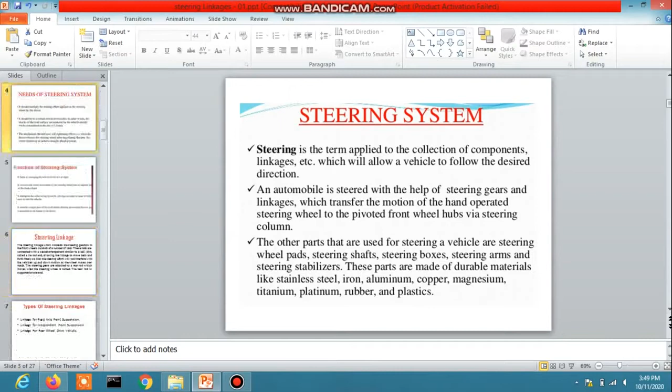Need of steering system. Some requirements of good steering are as follows: very accurate, easy to handle, provide directional stability, multiply the turning effort applied on the steering wheel by the driver, irreversible to a certain degree so that the shocks of the road surface encountered by the wheel are not transmitted to the driver's hand.

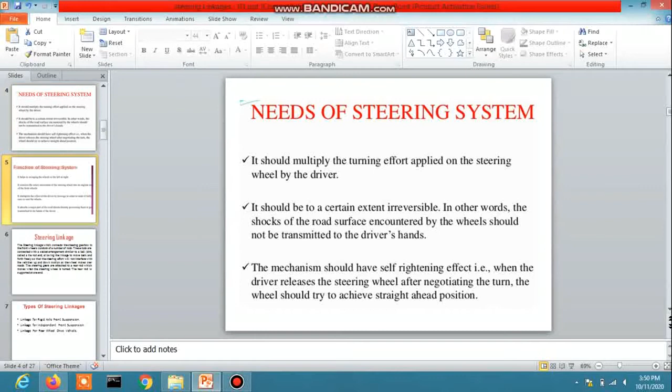Function of steering system. Some functions of steering systems are: the primary function of the steering system is to achieve angular motion of the front wheel to negotiate a turn. Second, to provide directional stability of the wheel when going straight ahead. To facilitate straight ahead recovery after completing a turn.

To minimize wear and tear of tires. To absorb a major part of road shock, thereby preventing it from being transmitted to the hand of the driver. And the last one is to provide perfect rolling motion of the road wheel at all times. So these are the functions of the steering system.

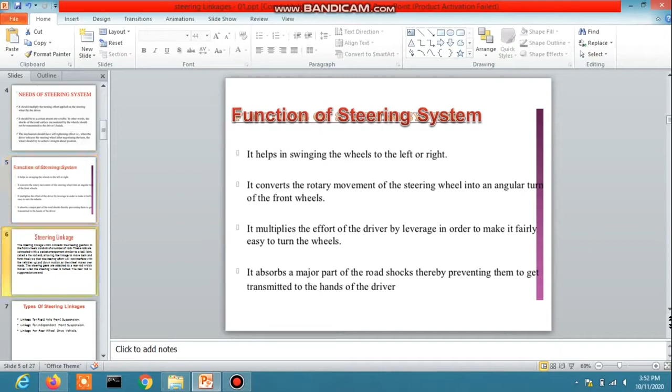Now steering linkage. Steering linkage, which connects the steering gearbox to the front wheel, consists of a number of rods. The rods are connected with a socket arrangement similar to a ball joint, called the tie rod end, allowing the linkage to move back and forth freely so that the steering effort will not interfere with the vehicle's up and down motion as the wheel moves over the road. Steering gears are attached to a rear rod which moves when the steering wheel is turned. The rear rod is supported at one end.

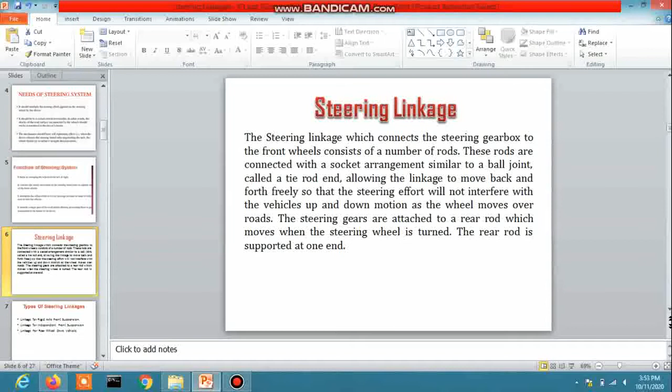Types of steering linkage. Basically there are three types of steering linkage. Depending upon the stability and simplicity, several arrangements of steering linkage are used on various vehicles. The first one is the linkage of rigid axle front suspension type. Second, linkage of vehicles employing independent front suspension. And the third one is the linkage for rear wheel drive vehicles.

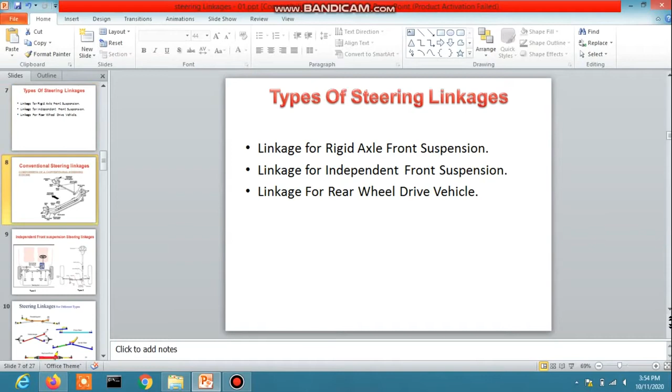Conventional steering linkage, that means this is the conventional type, that is the rigid axle front suspension steering system. So here is the picture of the conventional steering system. This one is the steering column or steering shaft or drive shaft. This is the steering gearbox. Pinions or gears are inside here.

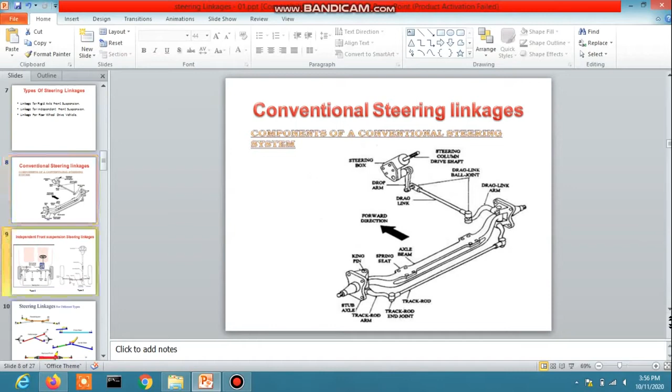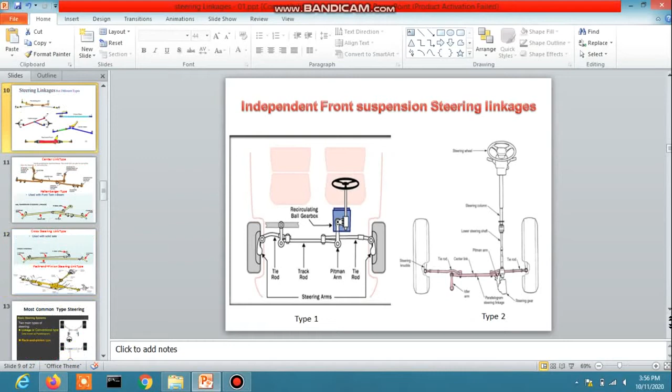Now there is the independent front suspension steering linkage. Independent front suspension steering linkage has two types. Here is the picture; there are two types of independent front suspension steering linkage. So the independent front steering linkages are of different types.

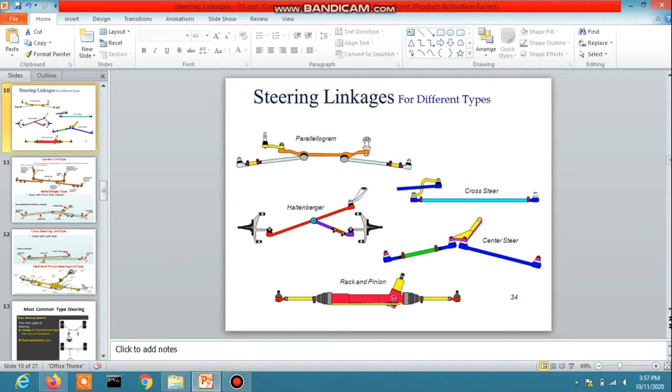One is parallelogram type or center link type. This one is the cross steer type. This one is the center steer type. This is the central link type steering linkage.

The typical parallelogram steering linkage: the central link also goes by the name of relay rod, drag link or connecting link. So the central link, one side is attached to the idler arm, which is attached to the body frame of the vehicle, and the other side is attached to the pitman arm, and the pitman arm is also attached to the steering gear.

Two tie rods are connected to the central link with ball joints, and tie rod adjusting sleeves are there. So inner tie rods are attached to the central link and outer tie rods are attached to the knuckle.

This one is the Haltenberger type, used with twin I-beam. Haltenberger steering linkage is basically the structure. One is the I-beam structure. So this is the pitman arm, which is attached to the drag link through a ball joint, and one end of the drag link is attached to the steering arm.

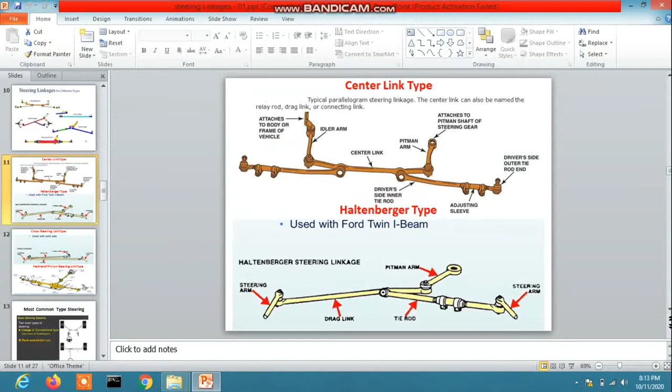Cross steering linkage type steering system, used with solid axle. Here we saw in the workshop, this Mahindra car is basically a cross steering linkage type steering system. So here the steering gearbox is not seen. This is the pitman arm; one side of the pitman arm is connected to the steering gearbox, and the other side is connected to the drag link with the ball joint.

The drag link goes to the steering arm or steering knuckle, and this one is the tie rod. The outer tie rod is connected to the steering arm, and the other side of the tie rod is connected to another steering arm. So this type is called cross steering link type steering system, and most solid axle type vehicles like Mahindra and other cars are using cross steering link type steering system.

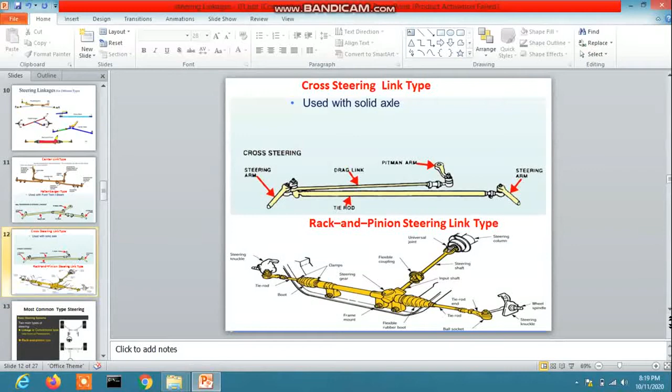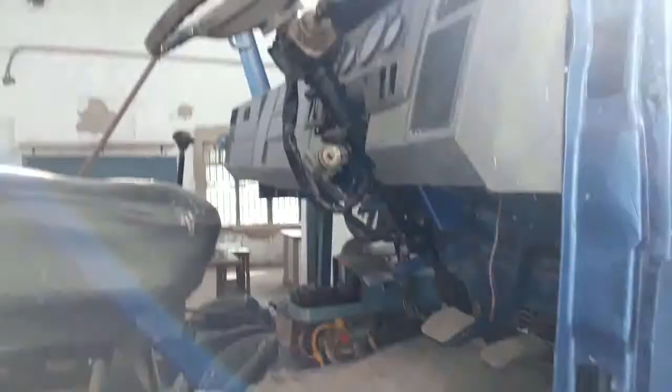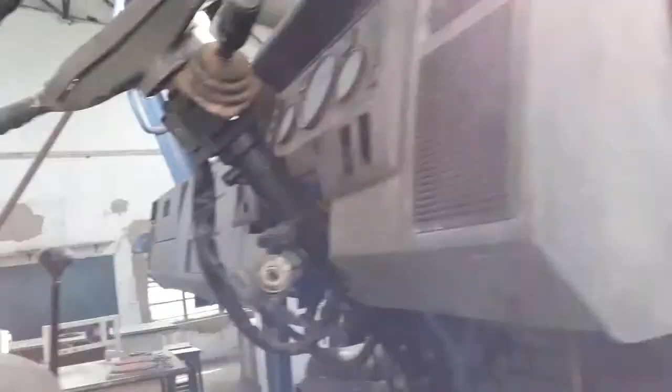So we also see this is the conventional type steering system, which is also used in Tata 408. It is the same process of linkage, but if you see the steering system minutely, this one is the steering wheel, this is the steering shaft, and this one is the steering column, which is the hollow type, and this is the combination switch.

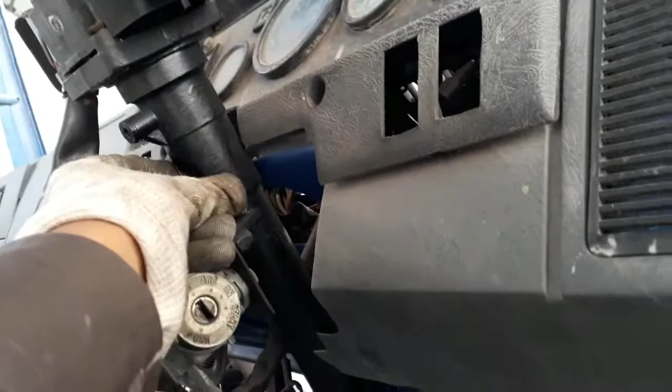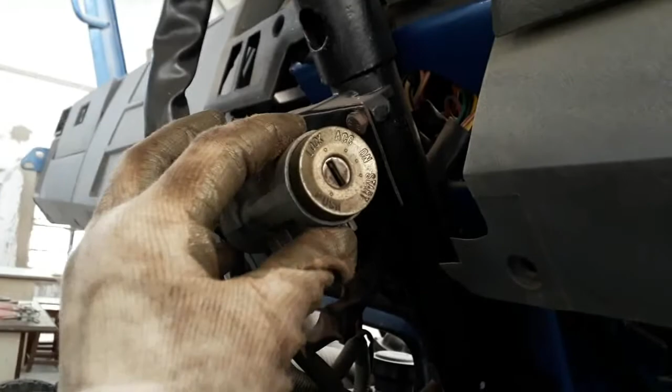This one is the turn signal light lever, this is the headlamp switch, and this other lever is the wiper lever or wiper switch, and this one is the locking device. And if you see, the steering shaft goes to the UJ, and this one is the intermediate shaft.

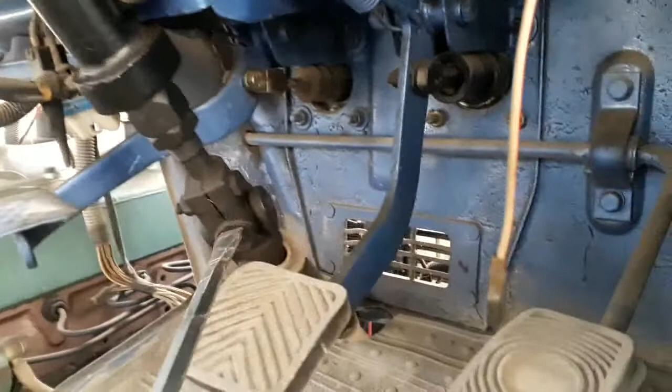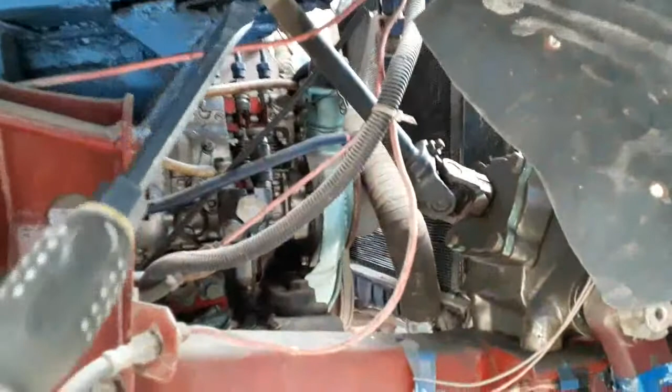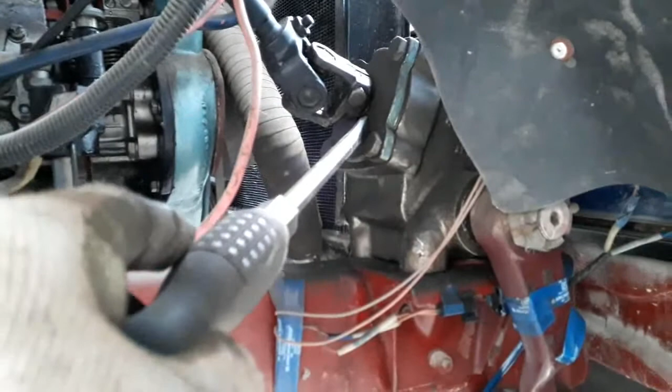If you see the lower part minutely, this is the intermediate shaft. This also goes to the UJ or universal joint, and the other part of the universal joint is connected to the steering pinion shaft, and this is the steering gearbox. This is another type of steering gearbox.

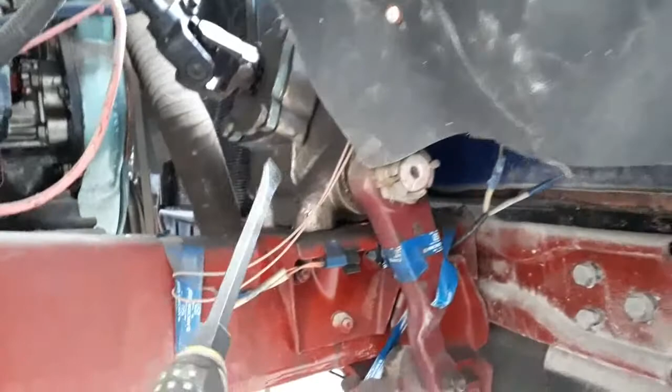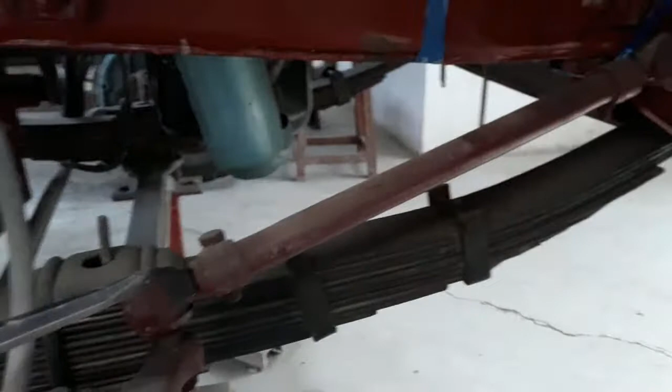Now if you see this one, after the steering gearbox, this is the cross shaft, and the cross shaft is connected to the drop arm, that is called the pitman arm, and the pitman arm is also connected to the ball joint, and this one is the drag link. The end point of the drag link is connected to the ball joint, and it is connected directly to the knuckle.

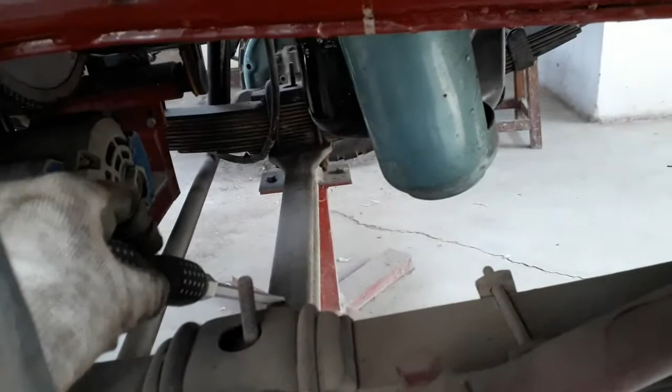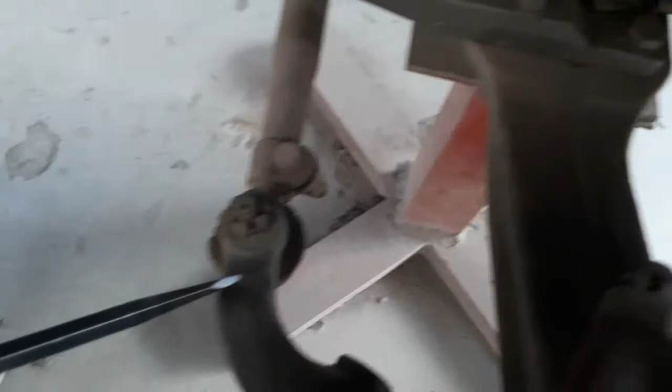Okay, and this one is the solid axle, that is the rigid axle, and if you see, the drag link is directly connected to the right side knuckle, and the other steering knuckles are connected to the tie rod, and this tie rod is a long shaft, and this is the ball joint. This is also connected to the knuckle and also connected to the tie rod. If you see, the tie rod goes to the other wheel, and it is connected to the knuckle. So this is the basic linkage of rigid type steering systems.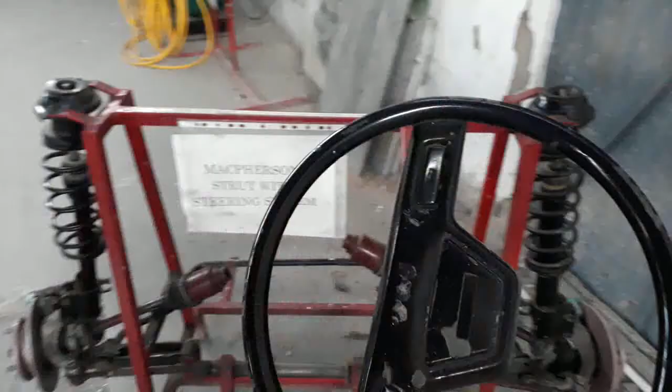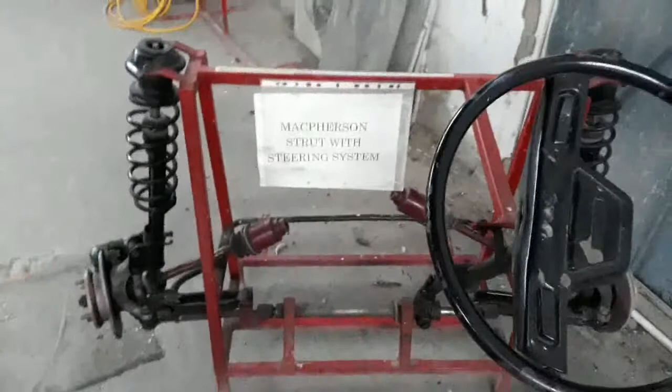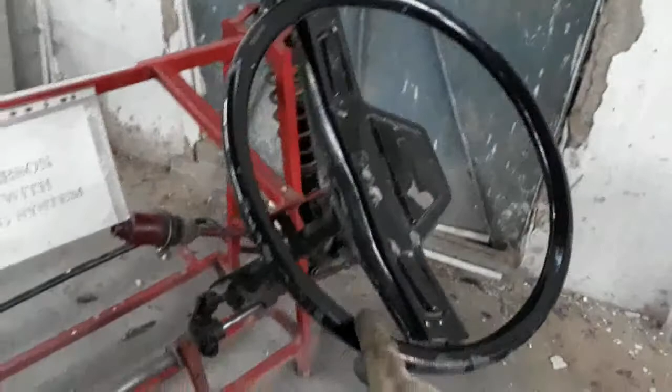Here, depending upon the stability and simplicity, several arrangements of steering linkage are used on various vehicles. Today we have discussed the independent type of steering system, which is called rack and pinion steering system. Now we will see the rack and pinion steering system linkage. So this one is called the steering wheel. It is basically a circular member of about 250 to 300 dia and used to render simple control to the steering.

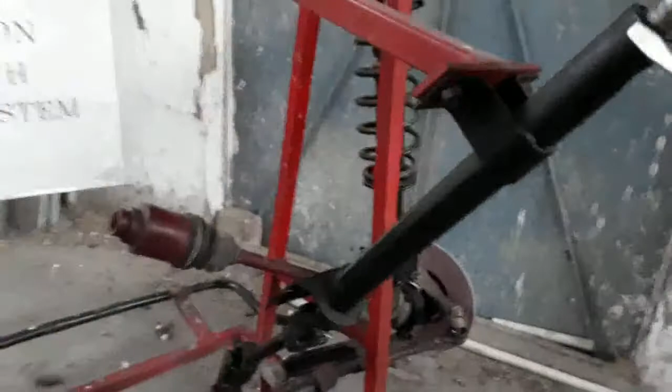In the modern age, steering wheels are required to be lightweight, so nowadays they are made of composite material like plastic or glass fiber combination, and another is zinc and aluminum based alloy, that is pressure die casting formation. Now this is the steering wheel. This is the steering shaft. This is the steering column.

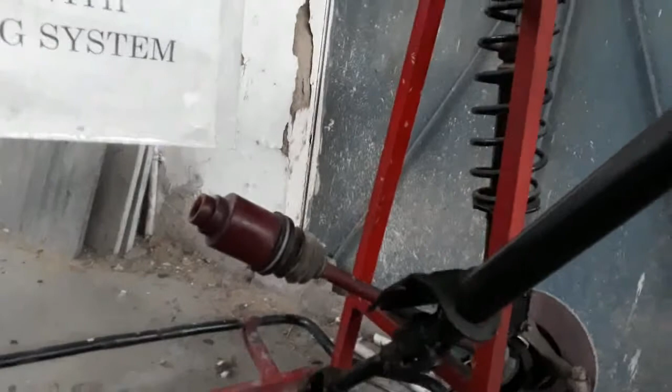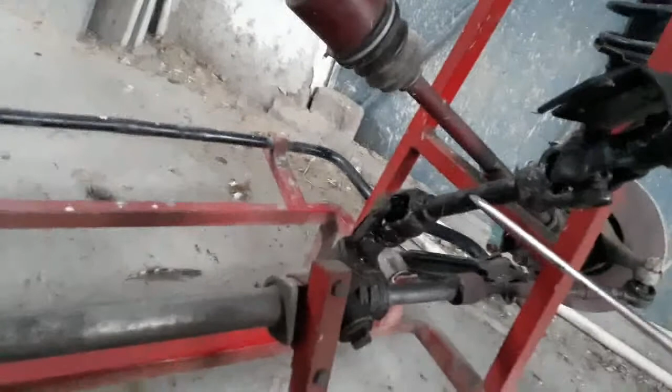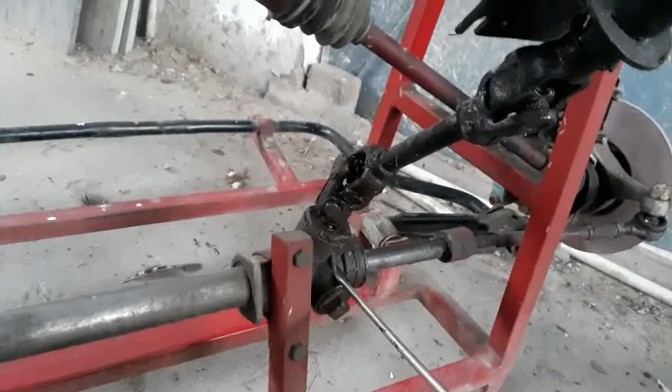This is a hollow type steering column, and the steering shaft is inside it and connects to the universal joint. So this is the universal joint. The steering shaft is connected to the universal joint. This is the intermediate shaft, and this is another UJ or universal joint, and this one is the steering gearbox, and this is the rack housing. This is called the rack housing, and this one is called the rack.

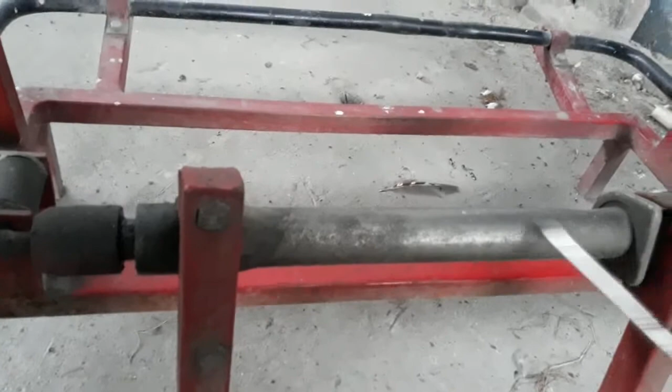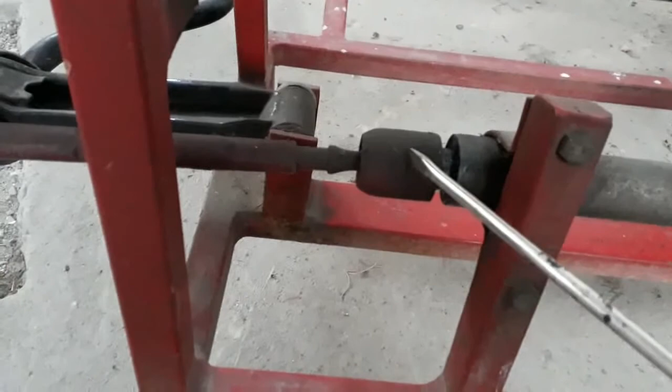So the rack is inside the rack housing, and here inside the steering box there is a pinion. The pinion is meshed to the steering rack gear. Then this is the ball joint, and this is the tie rod. This is called the tie rod. And this one is the tie rod end, and this is another ball joint which is attached to the knuckle by the lock nut.

So here also there are ball joints, tie rods, tie rod ends, and another ball joint. So what is a ball joint? The ball joint connects the steering arm with the track rod or tie rod. They are responsible for quick, easier and smooth transmission of motion from the tie rod to the steering arm. Wait. So this is the construction of the rack and pinion steering system.

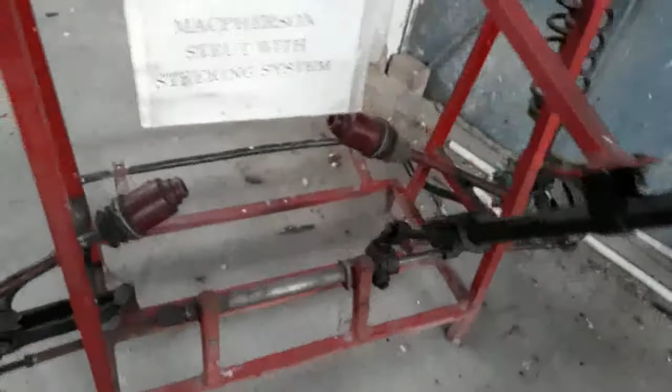This one is also the steering system. You have the steering gearbox. Look, this is the square nut, which is called the damping nut. Inside the steering gearbox, the pinion and rack are meshed strongly by the damping nut. When you open the damping nut, you will see some spring loaded dampers.

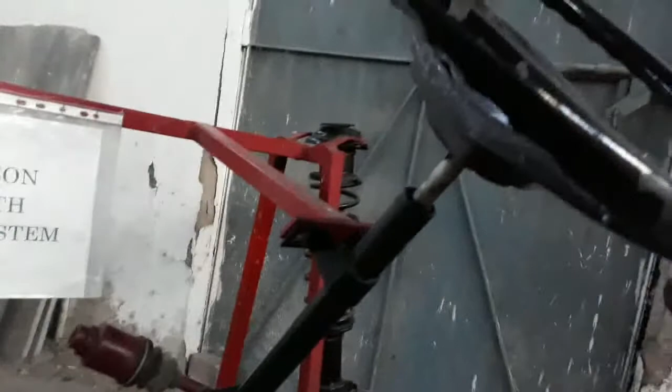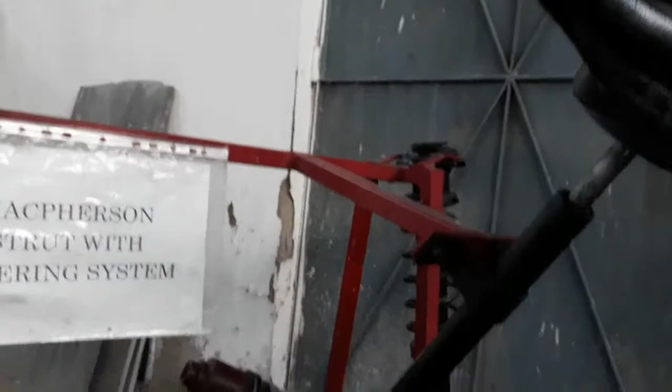Now see, when the steering wheel is turned, what is the function? When the steering wheel is turned, the circular motion is transmitted to the rack and pinion, and it is converted to linear motion. So what is the function? It transmits circular motion to linear motion. Okay, and the driver can drive the wheel in the track.